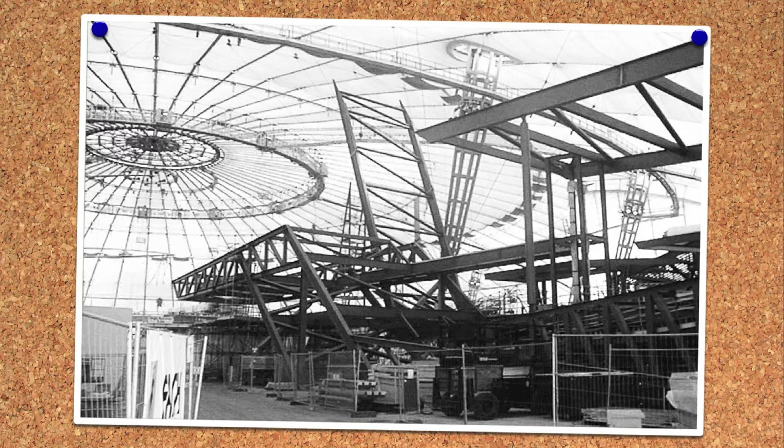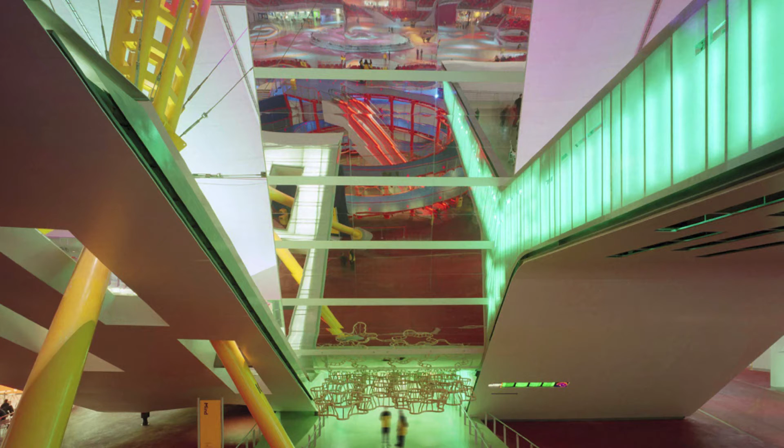The frame was, in some ways a bit clunky, but the overall result was a very exciting building, or at least a very exciting, large, inhabitable sculpture. In a way, it's a bit of a shame the New Millennium Experience Company couldn't find anything terribly interesting to put in it, but to be fair, there probably wasn't much money left in the pot at that point.

This project, Arup job number 55191, which is emblazoned on my mind, really did change my view of where the future might lie, and it was clear to me that these new digital design tools were bound to play a key part in what was coming next. Whilst I was proud of what we'd achieved, I couldn't help feeling it was a little bit of folly, a bit showy-offy, but that was its purpose in a way. I couldn't help thinking we ought to apply these tools to something more fundamental, more useful. And I wasn't alone in this view.

Next chapter: embedded intelligence. Around that time, I was introduced to a professor at RMIT, Royal Melbourne Institute of Technology, a guy called Mark Burry, who some of you may have heard of. This is not Mark Burry, clearly - this is, in fact, Antonio Gaudi. Because as well as teaching at Melbourne full-time, in his spare time, Mark was completing the design of Gaudi's Sagrada Familia Cathedral in Barcelona, which was quite a hobby, I thought.

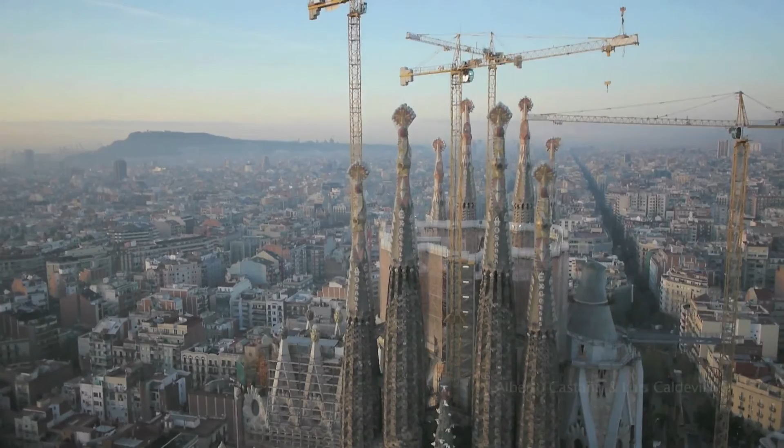Mark explained to me that Gaudi's incredible sculptural forms were actually based on a fairly simple set of geometric rules. He used two-dimensional templates connected together by plumb lines, string lines, to create these complex ruled surfaces, but defined them in a way that could be understood and built by traditional stonemasons.

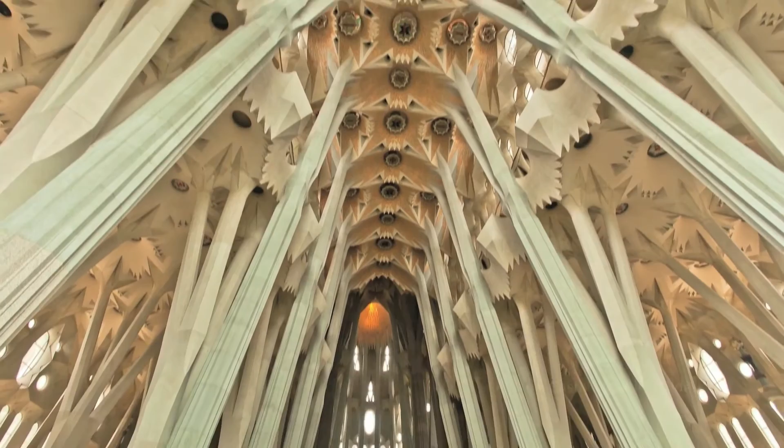He also explained that there wasn't a full set of plans explaining how Gaudi had intended to complete the missing bits of the cathedral. So to fill in the blanks, what Mark had done was build a 3D model, but one with a difference - a model built using software he'd borrowed from the aeronautical industry. The difference was that the model wasn't based on an explicit geometry, it was based on an algorithm, a set of rules that followed Gaudi's constructional logic.

He used this model as a tool to help him fill in the blanks, design the missing bits, but in a way where he was fairly certain he was creating geometries that would have been similar to what Gaudi had intended.

And the result's pretty stunning, I think. So he'd effectively captured the DNA of Gaudi's design method, and by linking this to the latest modelling software, he'd created the generative design engine. To my mind at the time, that was an absolute game changer. This was a way of embedding intelligence into a digital model, allowing the process to become holistic again, where the engineering logic and the construction logic didn't need to follow a predefined sculptural form, but could inform it in some way.

So this was very different to the process we'd had to use when designing the Mind Zone. It seemed to me like a bridge between this holistic legibility of the past and the then vogue for complexity of the present. So I and others started to think about how this intelligent modelling could be applied to our projects.

The basic idea is that you might start with this geometric model at one end that was based on a set of rules, and you might link it to a whole load of analysis in the middle - that might be the structural analysis of the building, daylighting analysis, spatial analysis, or whatever it was. By combining the results of that and modifying the model based on a set of predefined rules, you would end up generating a series of design solutions in a sort of semi-automated way.

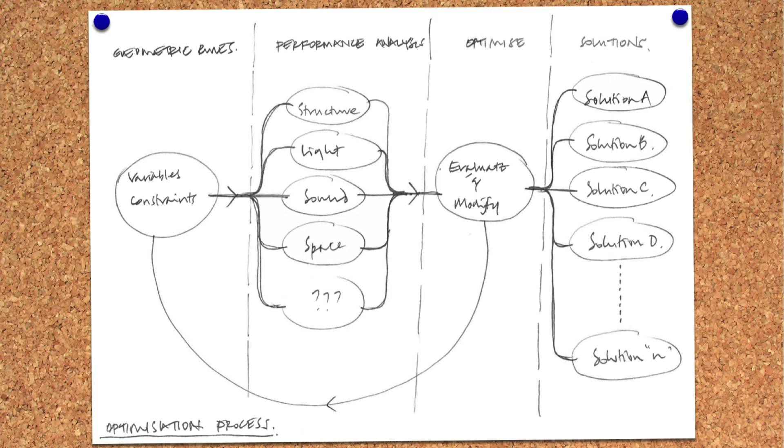Now, as a diagram, this is not necessarily related to a digital process. We do this every day when we design buildings. The difference is that we get to that sweet spot by experience, learned intuition, trial, error, debate, collaboration, and compromise sometimes.

But the opportunity to us seemed that we could develop a digital generative process that would always lead us directly to that sweet spot, only a process that would only deliver solutions that conform to all the relevant criteria. And it might generate variants, solutions that we wouldn't have been able to think of our own accord, and it might get us there a bit quicker too.

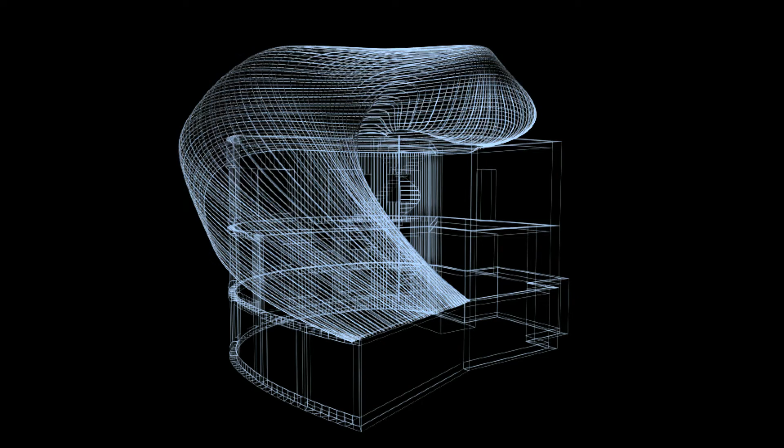And this was the result. So we have these splines that form a minimum surface to enclose the required volume, that's then faceted because we wanted to make it out of flat panels, and the depth of the facets responds to the structural demand within the system, and the ratio of solid panels to glass panels responds to getting adequate daylight within the space and getting the right thermal performance for the envelope. That was how the whole geometry was generated.

But hang on, I hear you say, that's just a crazy shape. And in a way, you'd be right. It's true to say that through the process, the design had become far, far too complex somehow. And maybe Mark had a preconceived aesthetic in mind as well.

It turned out that the modelling required some really, really expensive software, and it required a computer scientist with a PhD to run it. It was a very steep learning curve, and actually it was pretty bloody difficult. And I know there are others in the room that worked on the project who can attest to that.

So eventually we ran out of time, and the client sort of ran out of patience, and it got canned before the design was completed, so the project never happened. We'd failed in a way, we'd failed spectacularly, but although we'd failed, I think we all remained convinced that the process had enormous potential. Maybe we were reaching a bit too far for where things were at that time. But I felt sure that within a few years, this type of approach would certainly become the norm. It would become the mainstream.

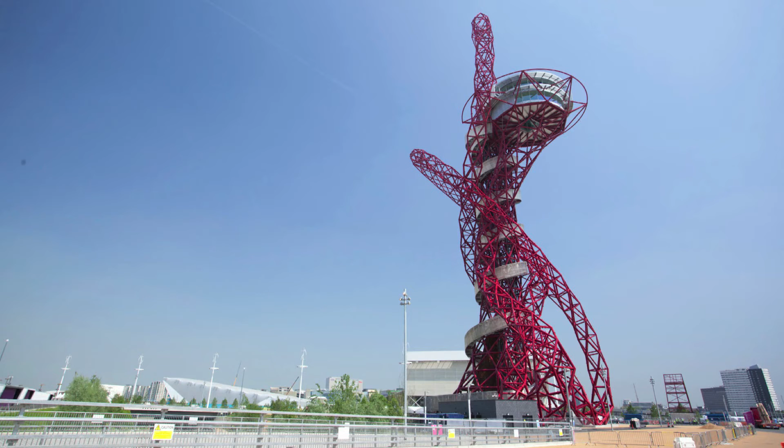Now, all of this was about sort of 98 to 2003. So what's happened since then? Has anything changed in the last 10 years? Well, certainly the tools have evolved. You no longer need a bank loan or a PhD to drive the software. Programs like Rhino and Grasshopper have become fairly ubiquitous. So where are we now? Okay, we're still building crazy shapes on an even bigger scale.

And I suppose that according to my definition, this is in a way still a folly. The engineering and construction logic does not drive the form, it certainly follows it. But this is also, in my view, an incredible piece of engineering, one that certainly pushed all of our modelling and analysis skills to the very limit.

It doesn't have that embedded intelligence that I was talking about necessarily in its modelling, but then again, it's a sculpture. The engineering should follow the shape and not the other way around. So I think we should celebrate this building, or this sculpture, for what it is, because it's not a building.

This is a current project that we're working on that's a bit more building-like. It's 2 greenhouses for Bombay Sapphire.

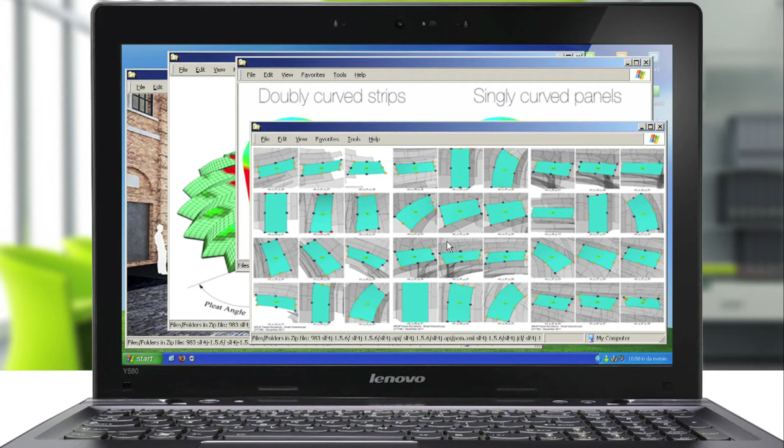Again, it's a complex geometry, but here we've used a rule-based model to help simplify that geometry. So we're able to understand how changing, for example, the pleat angle might affect the shape of the glass panels. And we can play around with different geometries very easily, very quickly, to simplify the construction without losing the essence

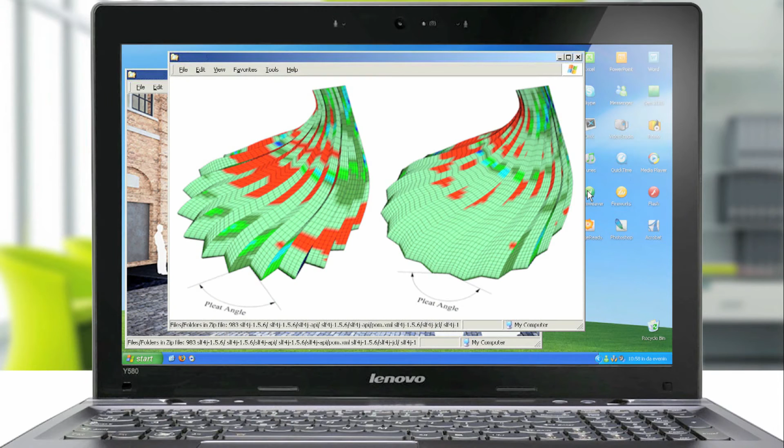of the sculptural form. So we can test whether singly curved strips of glass will work equally as well as doubly curved strips, but obviously easier to build. So this is a step forward, I think.

Here the construction logic is driving the design, via this digital design and delivery process that also automatically generates the full cutting patterns for the panels. It's a move forward, but it's still not driving the design using the engineering criteria, just the construction logic.

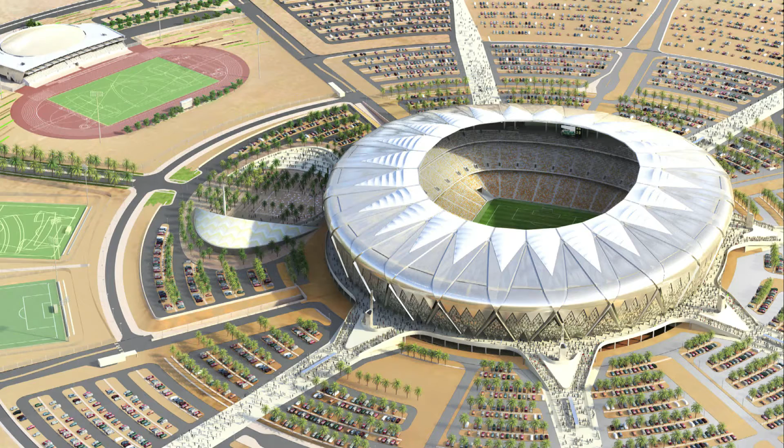So here's another example, which I think is a really good demonstrator of where we're at. It's the current state of the art. This is the KASC Stadium project in Saudi Arabia, and it's a project that is being delivered under an incredibly tight timescale. And clearly there are significant engineering challenges in a major building like this, particularly the design of the stadium roof.

And here we have used a parametric model to set out the roof geometry, and the model is linked to this schema. So this is the algorithm. These are the rules of the game that define how that geometry is set up, and this is what we

can play around with to pull the geometry in and out and link it to the results of our structural analysis. So the result is an optimized structure, one that is self-generated to an extent based on this algorithm, and the deliverable is a fully detailed design that can get plugged straight into the BIM model.

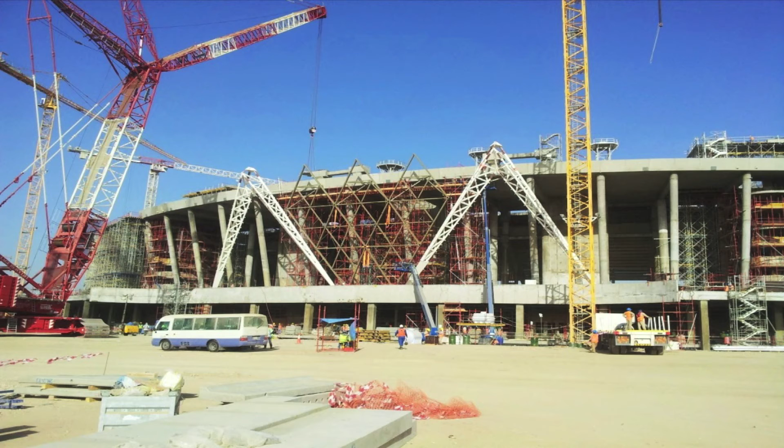And we're building it. So this is a project that was originally, we were asked to go from sort of concept to completion in 36 months. Halfway through the process, that got changed to 24 months, and we're still going to just about do it. And that's been partly, or to a large extent, I think, enabled by the use of these digital tools and by being able to automate the design process in the way that we have.

So here we are, this is it. This is no longer folly. This is reality. But it's still not quite there because all we've done here is we've optimized one performance criteria, just the structural design, and only for one bit of the building, just for the roof. It's not the all-singing, all-dancing version that I was hoping for and that I'd imagined.

So is this panacea just a fantasy, really? Have we kind of plateaued here? Has the digital design wave broken? Is this the end of the road? Well, here's one final example that I think, to me, offers more hope.

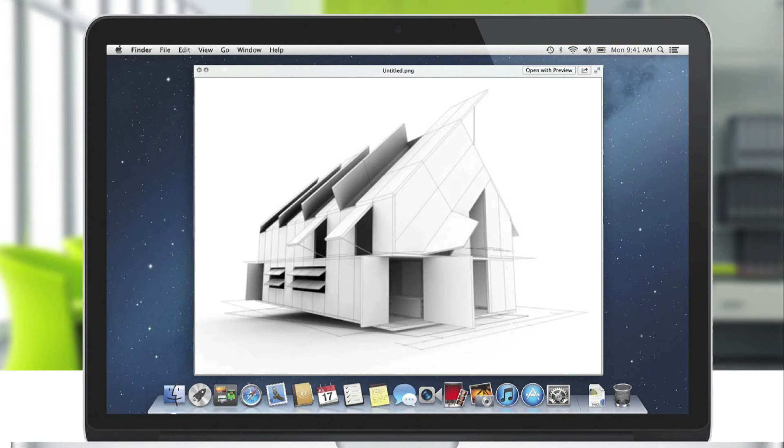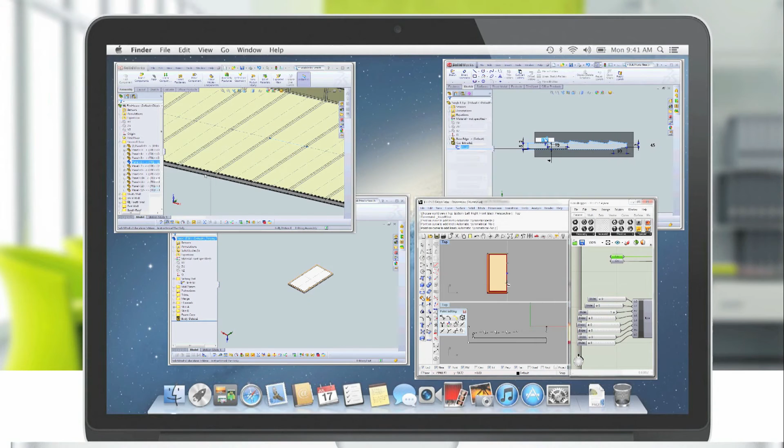So like most modular housing schemes, it's a kit of parts, essentially. In this case, it happens to be made from thermoplastic panels that are snap-fitted together. But the step change here is that the design of the components and the different configurations, the way that they can go together, is based on a rule-based model that conforms to some fairly simple criteria. So size of rooms, span of floor plate, number of windows, size of windows, orientation.

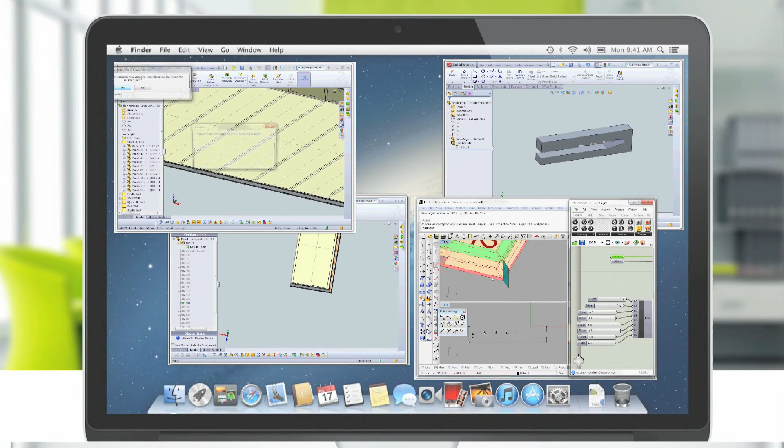The intention here is that with the right user interface, anyone can design themselves a good house. The system will only allow you to configure things in such a way that you hit that sweet spot in the middle of the design space diagram. You'll only ever end up with a house that works.

Once you've designed your house using the tool, the model automatically generates all the machining information needed to CNC cut the panels and 3D print the components, so the whole lot can arrive flat pack at your front door ready for assembly. It's still a research project, but it's pretty close to reality, and it really does do what I think we all thought we wanted to achieve with this process.

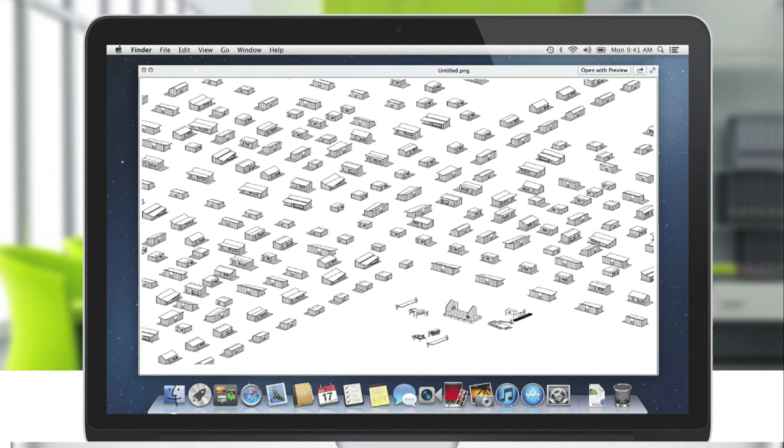Here, Mark has totally suppressed the desire to impose any kind of architectural aesthetic. That's not what it's about. It's not about geometric complexity either. It's very, very simple. It's not a boutique project trying to exploit these tools for their own sake. To me, this represents a sort of honest, performance-driven design where the aim is to deliver something socially useful with infinite variety and high quality.

This, to me, is what the digital design revolution has been aiming for. It's what it's about, and we're nearly there. This is not about style. This is about value. It's about substance.

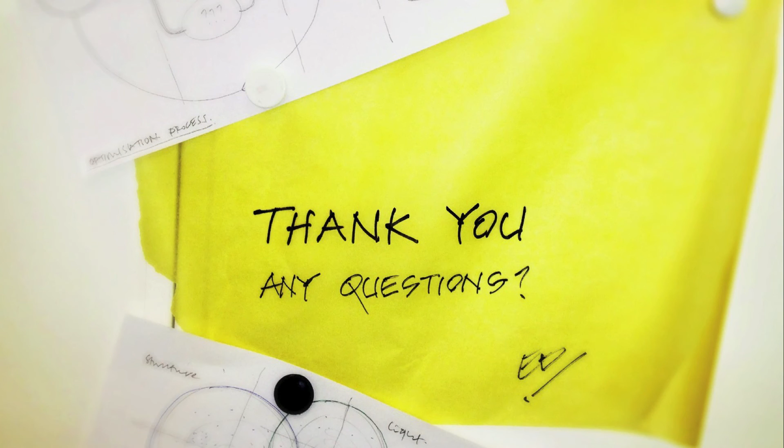I thought it was extremely interesting and very provocative. I was saying afterwards, you know, I'm an architect, and I sometimes think architects get in the way of the structural logic. So I think there's a kind of structural logic, or the logic that engineers apply, to bring a discipline to our design process. And I suppose what I found this morning is that maybe there's a way emerging of reintroducing that kind of discipline to give an economy of means to the realization of some of the more extreme forms that many of us in our profession are producing.

So I think it's a very interesting juncture. And I suppose the hanging question is what next, and I guess that's the subject of another debate and another talk on another day.

I thought it was absolutely fascinating. Yeah, it was really interesting. There was a good analysis of the legible and the illegible, and I thought it was a really good discussion that went with it. I'd have loved to contribute more, but I think I need to watch it through again on YouTube and understand it a little bit more, because there was a lot of intellect there. As you said afterwards, there was a lot of good summing up at the end, and I'd like to understand the flow I've been through as an architect, seeing all sides of that. It was actually very interesting.